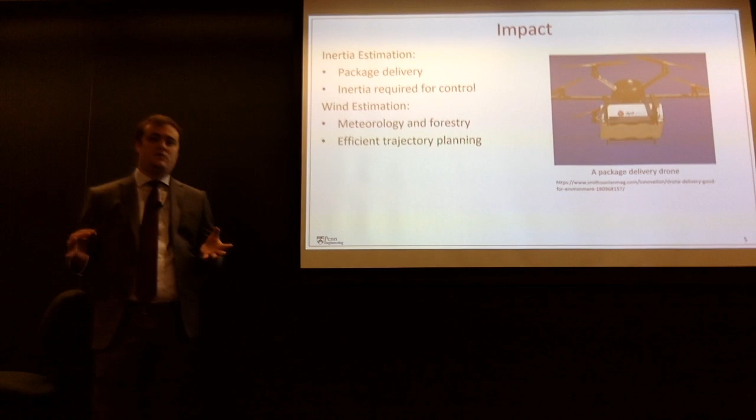Therefore, we have to design some rich trajectories that excite the system and get it far away from hover. The impact of this work is basically on package delivery. For inertial parameter estimation, this is important because when we're doing package delivery, we're constantly picking and placing packages, and that constantly changes the inertial parameters of the vehicle. If we don't know those inertial parameters, then we cannot precisely control the vehicle.

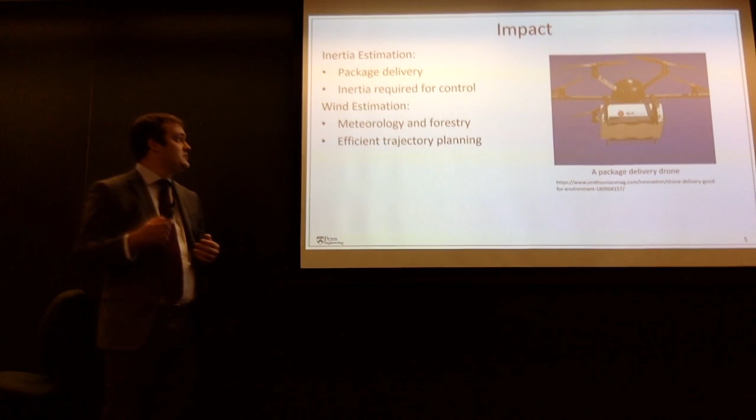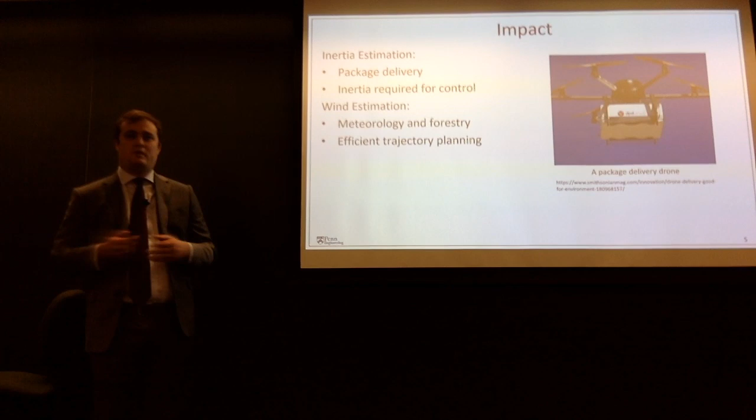We need to have some state estimation of those parameters online. In addition, wind estimation is important for any outdoor application, such as meteorology. Specifically, one that we've looked at is forestry. Spreading forest fires, predicting the spread of forest fires, is basically done using wind velocity estimates. Currently, the methods for doing that are very crude. They involve setting up a tower and a lot of manual labor, and you can only get a velocity estimate at one point in space at a time.

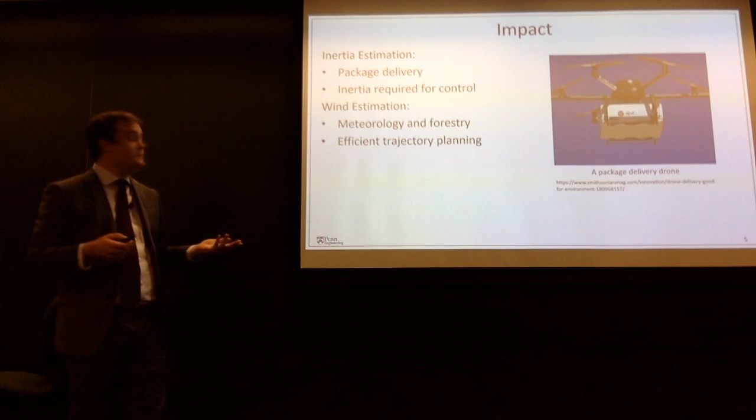But with a quadrotor, you can just send it up and get velocity estimates at varying points. Also, wind velocity estimation can be used to plan efficient trajectories that take advantage of the wind direction.

So the contributions of this are that we develop an IMU-based unscented Kalman filter that uses the full dynamics of the vehicle, Newton-Euler dynamics and motor dynamics, to estimate things like tilt, velocity, twist, and inertial parameters and aerodynamic parameters, and sensor biases.

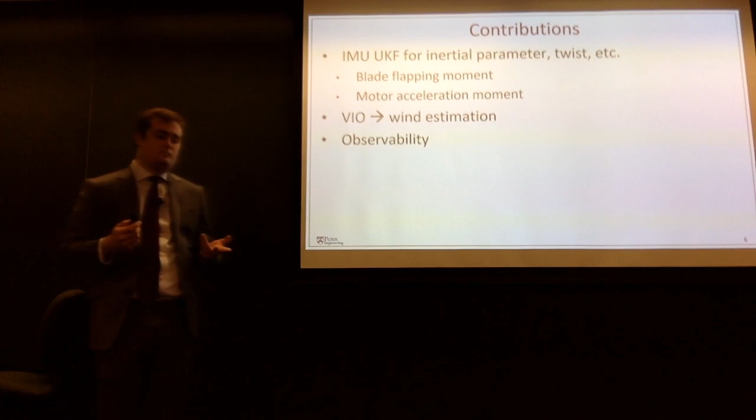In doing this, we estimate forces or moments acting on the quadrotor that we didn't anticipate would be significant, such as the blade flapping moment, which I'll discuss later, and the moment required to accelerate and decelerate motors.

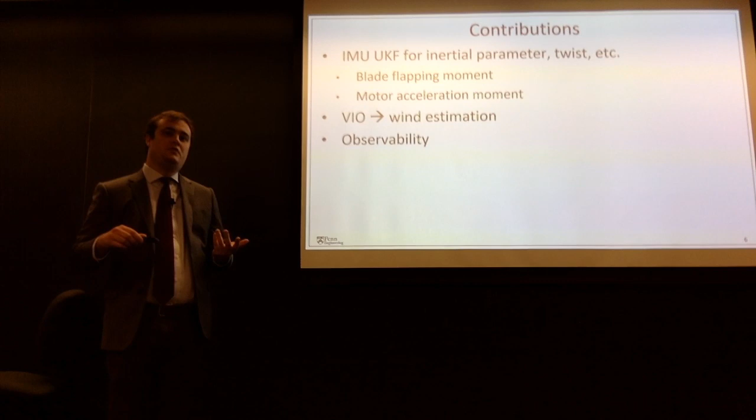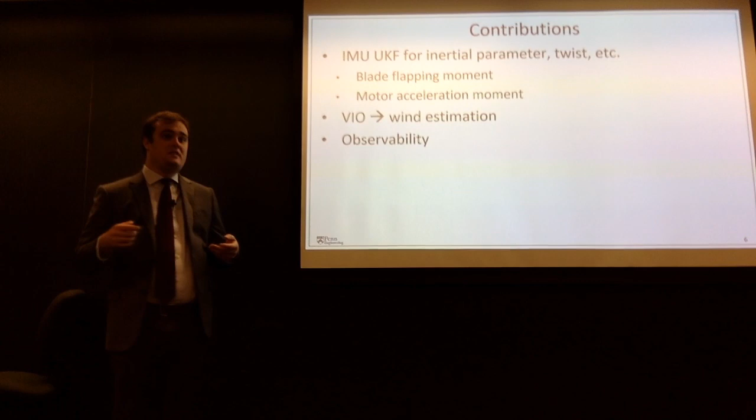In addition, we'll incorporate VIO into this filter to estimate the wind velocity as well. Then we will present observability analyses in the paper that show when these systems are observable, and I'll touch on that a bit in the presentation.

For a literature review, the most important works that we base all of our principles on are aerodynamic modeling, lumped parameter modeling works for propellers. Moses Bangura did a huge work on this that involves estimating lumped parameter models for the thrust variation of a propeller as a function of the induced velocity, which is the additional velocity that the propeller imparts to the air passing through it, as well as the velocity of the propeller relative to the air and the angular velocity of the propeller itself.

Induced velocity is hard to know, and it's very challenging to capture. So our contribution was to approximate the induced velocity as functions of the other two parameters, the blade angular velocity and the motor hub velocity relative to the air. We came up with a simpler model for thrust variation using that. In addition, Philippe Martin's work is also important because he models other things like blade flapping moments as well.

For velocity estimation, there are the following works. Abeywardena and Leishman did very similar things where they took these types of aerodynamic models and estimated the velocity of the quadrotor projected into the rotor plane, so they only estimated 2 degrees of freedom of the velocity. What Allibert did is he estimated the full 3D velocity using an induced power model for the propeller.

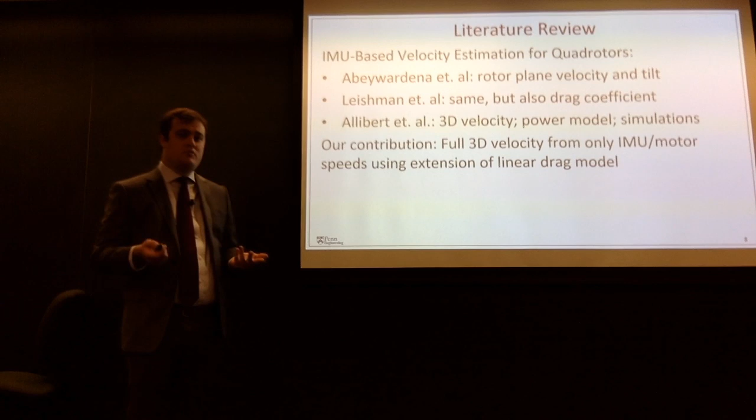His results are only in simulation, and his model assumes that many parameters are known, which are not very practical to know. So what we do is we don't make the assumption that many parameters are known. We basically assume that all the parameters are unknown, and we do full 3D velocity estimation using a simple linear drag model that also captures the thrust variation that I talked about earlier.

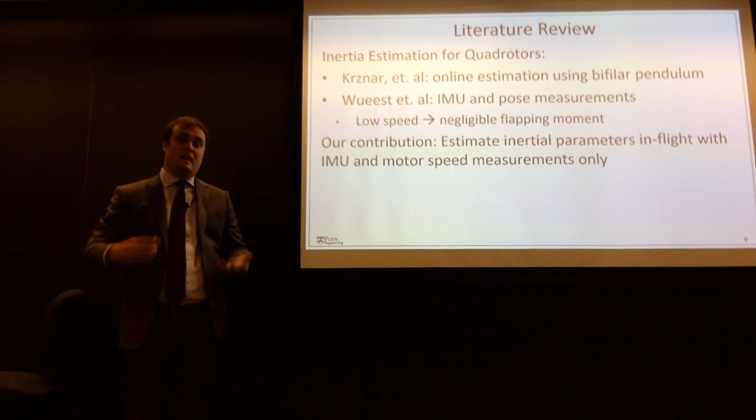For inertia estimation, there are a couple of works. The most important one is Valentin Wueest, a student in our lab, who did IMU-based state estimation using pose measurements for the moment of inertia of the quadrotor. Because he used vision, his system was observable in hover, so he could fly at low speeds and didn't see some of the aerodynamic moments we are modeling that appear at high speeds. Our contribution is that our system is not observable in hover, so we must fly at higher speeds and therefore capture these moments as well.

There are also many works on wind estimation for quadrotors. Most of them use indoor tests with linear drag models, testing with fans and similar setups. We want to capture wind velocity outdoors with a ground truth sensor measurement, an anemometer, and use the full Newton-Euler dynamics to estimate the 3D wind velocity, which very few of these works do. None of them really do it the way we do, specifically in how we model blade flapping as an independent effect.

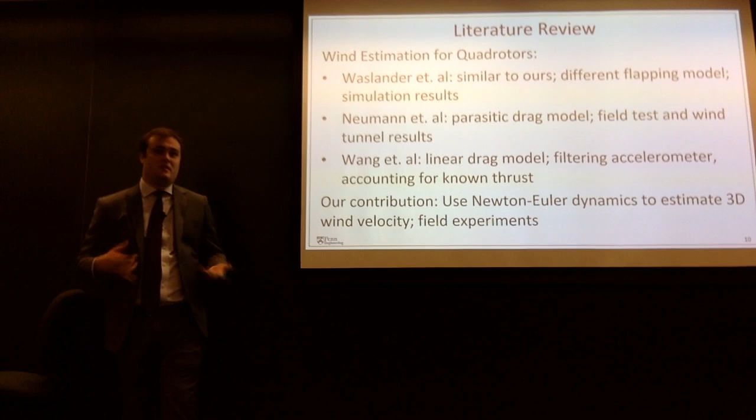So the next work that I'll cover is my past work, which will be somewhat brief. And for preliminary information, I want to...

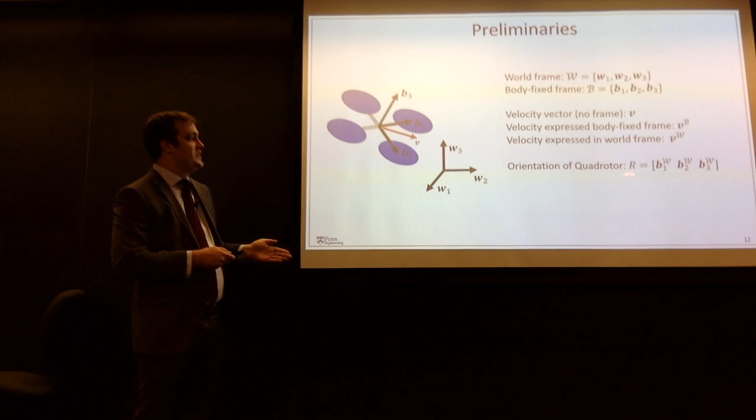I want to introduce the world frame, which is an inertial reference frame fixed to a point on the ground. It does not move or rotate. Then we have the body-fixed frame, B, which is fixed to the quadrotor and rotates with it. A vector V, shown in red, can be expressed in either the world frame or any other reference frame, but it doesn't need to be expressed in one. When not expressed in a frame, we just write V. If expressed in a frame, we write V with superscript B for the body frame or W for the world frame. For example, the orientation of the quadrotor, R, is a matrix whose columns are the basis vectors of the body-fixed frame expressed in the world frame.

Now we have the standard quadrotor model. This standard model, found in most literature, only models the thrust forces, these vectors here, the weight of the quadrotor, this vector, and some moments. These moments are drag moments: when the propeller spins quickly, there's drag proportional to the tip speed squared of the propeller. This moment produces a counter moment on the quadrotor frame, which is used to control the yaw of the quadrotor.

The rotation dynamics are presented in the body-fixed frame here. This red term accounts for the fact that we are differentiating vectors in a rotating frame, so we have to compensate for the frame's rotation. The reason we do this in the body-fixed frame is because the inertia tensor is expressed as a constant matrix in that frame.

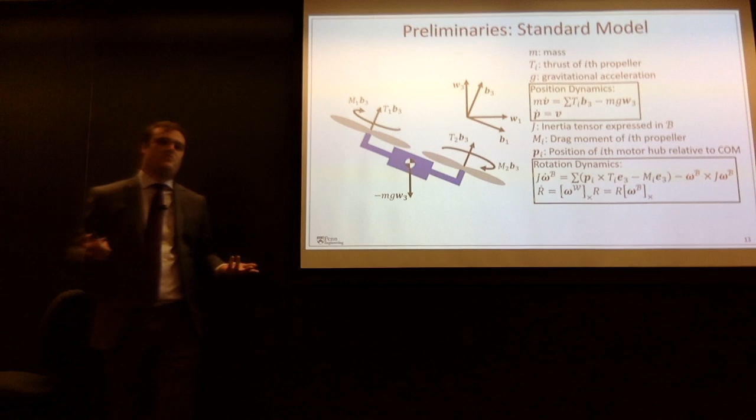The IMU is an important aspect of our research. It has a 3-axis accelerometer, given by this mass-spring model system, and a 3-axis gyro, which just measures a biased angular velocity, shown here.

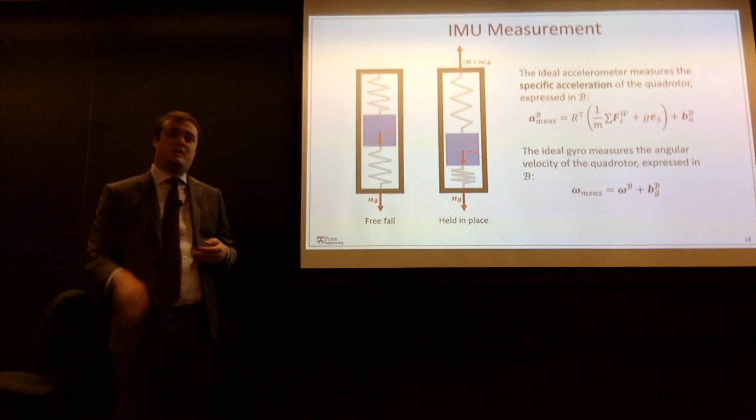The accelerometer is a bit more complicated: it measures the specific acceleration of the quadrotor, which is the acceleration caused by every force except the weight of the quadrotor. This red GE3 term cancels the negative term in the sum of forces, because when an accelerometer is in free fall, the housing and the mass inside accelerate at the same rate, so the springs do not deflect. Therefore the sensor does not sense the effects of gravity—even though it's accelerating down at 9.8 meters per second squared, it measures zero.

Now, the drag model basically takes this standard model and modifies it with a drag term that is proportional to the hub velocity in the rotor plane.

What we did in the past is we assumed that the angular velocity of the quadrotor was small, and therefore the hub velocities are moving at the same speed as the center, or the same velocity. The hub velocities and the velocity of the center of mass are basically identical at that point.

So we model this as being proportional to the velocity in the rotor plane. VRP is the velocity of the center of mass of the quadrotor projected into the rotor plane, and it's proportional by this constant here. The reason it's proportional to the velocity in the rotor plane is because the dominant velocity here is the tip speed squared of the propeller, and therefore that lies in the rotor plane. That's why this drag force is in the rotor plane.

When we measure this, when we use this drag force in an IMU-based model, our horizontal component of the accelerometer measures the drag force that is being exerted on the quadrotor.

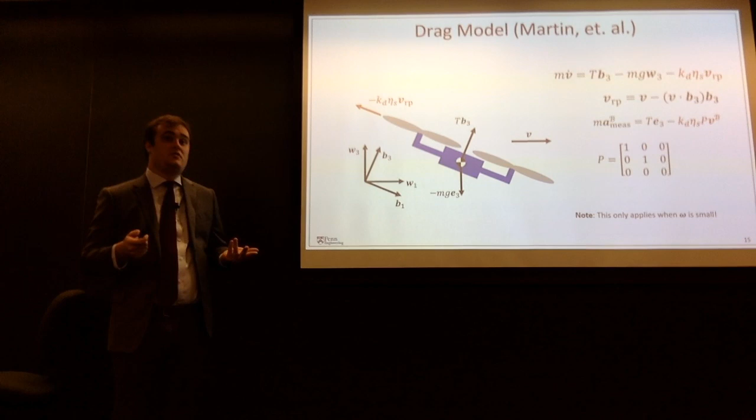Now what we did in our ICUAS work is we extended this drag model to account for the variation in thrust due to the fact that a quadrotor, when it climbs in ascending flight, loses thrust, and when it descends, it gains thrust. The reason for that was explained in my proposal, but basically we modify this model with a red term.

This red term is basically proportional to the velocity projected onto the B3 axis of the center of mass of the quadrotor. This term is lumped together with the drag force I just mentioned, and the reason for that is because they're both linear.

It's important to note that this is not truly a drag force, but just a modification to the thrust vector. But it behaves like a drag force, so that's why we lump them together.

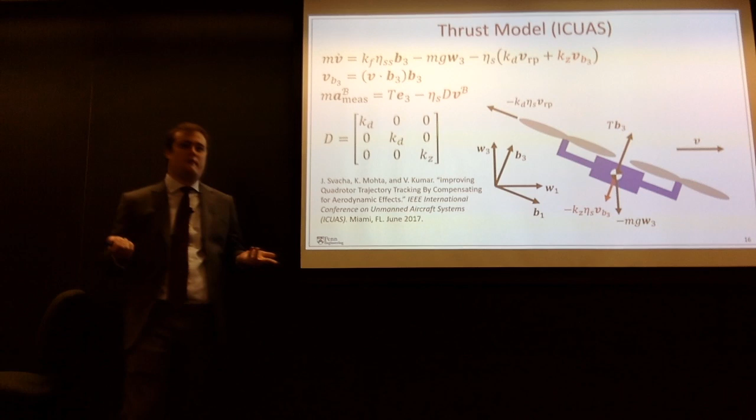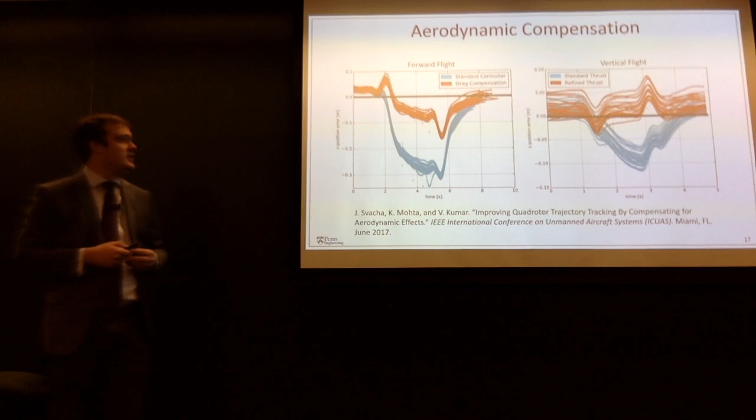On the right, we have the same type of experiment, but we're compensating for the change in thrust now, and we are doing vertical flight tests on the right, and you can see similar results for that. So we were able to show that we can compensate for these effects, and that they are indeed significant.

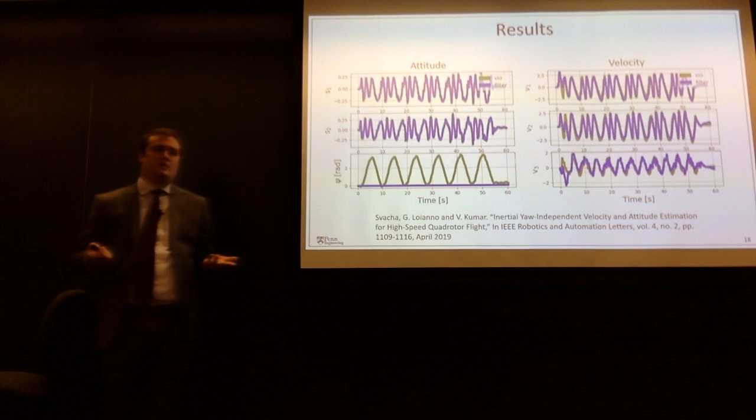I want to highlight the fact that we are using a strapped-down, inexpensive, and low bandwidth sensor to estimate wind velocity relative to the air, or indoors, essentially velocity relative to the ground of the vehicle. This is significant because normally you would have to use vision to do this, and that would incur a lot of overhead. But for completeness, we did use vision for yaw estimation.

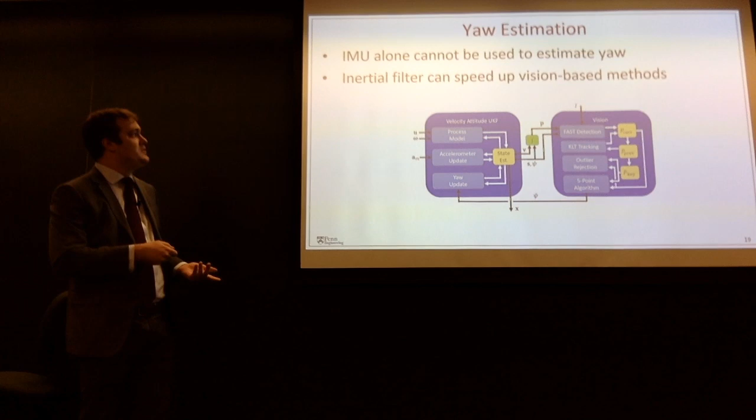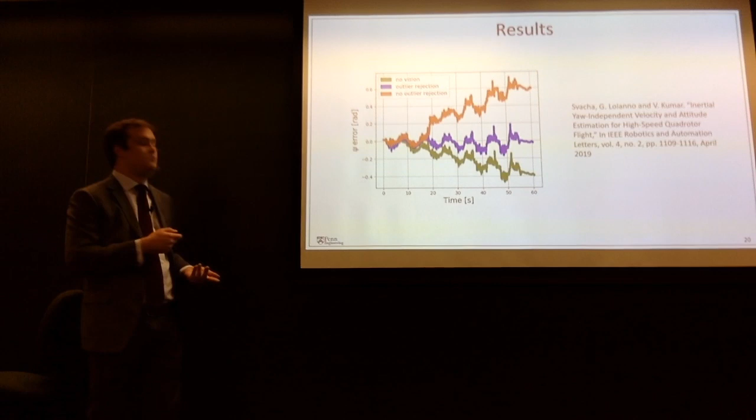The point is that the outlier rejection was significantly faster, and it was also working, because this blue curve is much smaller in magnitude than the red and green curves. The green curve corresponds to dead reckoning, and the red curve corresponds to using vision without outlier rejection. So it's clear that the outlier rejection did improve things, and that the vision was working for the yaw estimate.

Now I'm going to discuss the bulk of my presentation, on the recent work I've done since my proposal. Everything we're about to cover can easily be extended to multi-rotor vehicles in general, not just quadrotors. We think doing so is easy and isn't even worth extra research, which is really good for us.

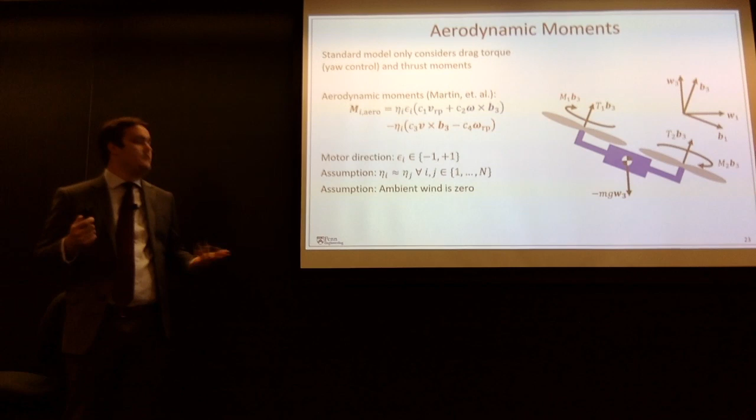So the aerodynamic moments, the red term I just showed, can be split into this green term here, which is a blade flapping moment, and the blue term here, which is a thrust difference. It's basically a damping: when you roll with an angular velocity, there's a damping term. I'll talk a bit about both of those.

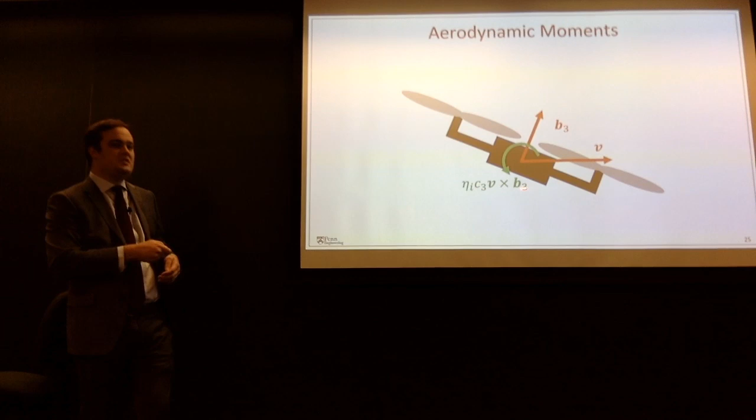The blade flapping moment basically acts to counter a quadrotor in forward flight. It's pitching forward to accelerate or keep a constant velocity if there's drag. What the blade flapping moment does is it acts in the V cross B3 direction, out of the board using the right-hand rule, and it basically functions to resist the forward tilt of the quadrotor. That's a bit of intuition about what the blade flapping moment does.

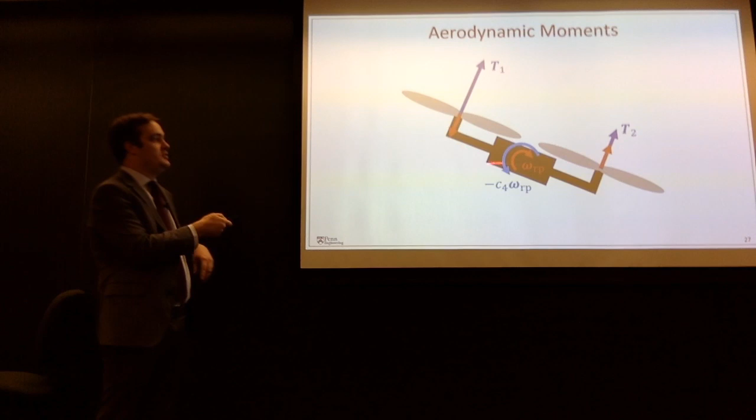Now the other moment I mentioned was the damping term. Due to the variation in thrust from the velocity of the hubs, when rotating clockwise in this case, this hub has a downward velocity and this hub has a velocity in this direction, so they exert drag-like forces. These drag-like forces cause the moment shown in light blue here, which again is a damping term that resists the direction of angular velocity.

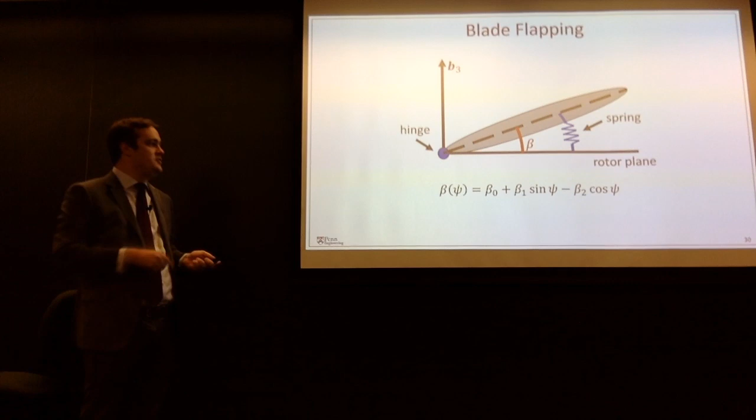Now, the moment here in the AI1 direction is proportional to beta 1 because it is the moment reacting on the hub at 90 degrees azimuth, and beta 2 is proportional to the AI2 flapping moment.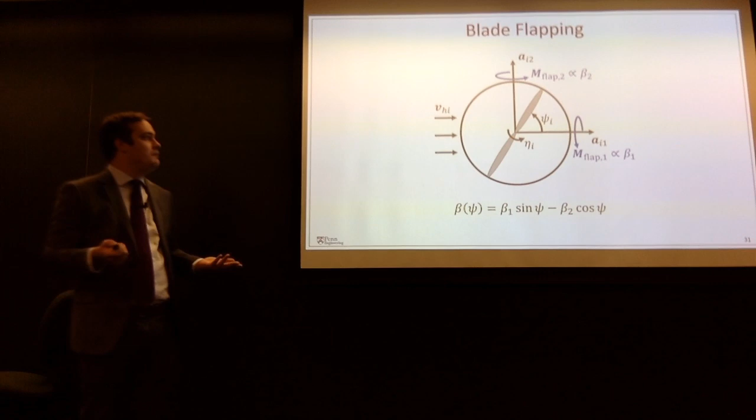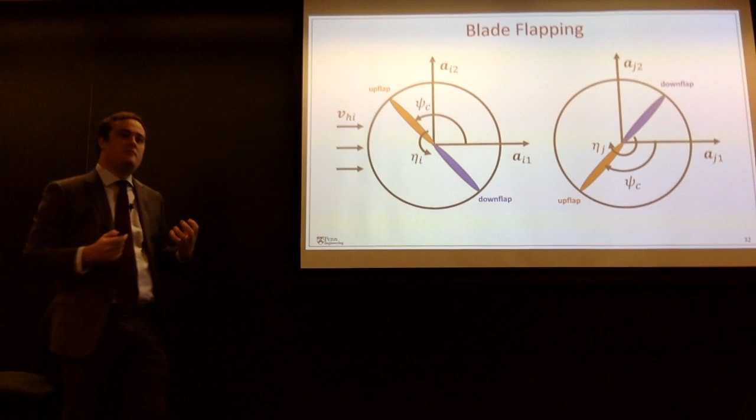We want to see which of these is more significant. Do we need both moments, AI1 and AI2, in the model, or can we only take one of them? This slide shows a counterclockwise propeller and a clockwise propeller, and the point is that the maximum flapping, the azimuth angle corresponding to the maximum flap, psi sub c, is the same magnitude for both, but it's defined differently for clockwise and counterclockwise propellers.

This means we'll generate these moments shown in red here, and when you sum them up, since you have an even number of clockwise and anti-clockwise propellers, the AI2 components accumulate because they're pointing in the same direction, while the AI1 components cancel because they're pointing in opposite directions. This is why the blade flapping moment is in the V cross B3 direction.

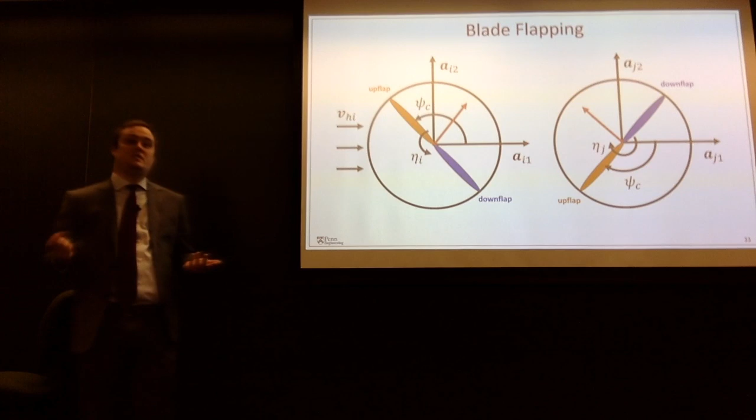So now that I've explained the intuition behind blade flapping, I want to ask: is it significant? We tried to do the estimation without it at first, just to keep things simple, thinking it's probably not significant, because these are very stiff blades. Why would they flap very far distances?

This ends up being because we ignored the blade flapping moment, and we had such high velocities in our trajectory to keep the system observable. But at first we didn't see this, and we were troubleshooting, thinking: okay, what can be wrong? We must be missing some kind of effect, assuming we implemented the filter correctly.

That are significant on the vehicle. So how does the filter compute the angular moment of inertia of the vehicle? It regresses the angular acceleration, assuming the Coriolis term is small, which it usually is, against the moments on the vehicle, so they're proportional to each other by the moment of inertia J.

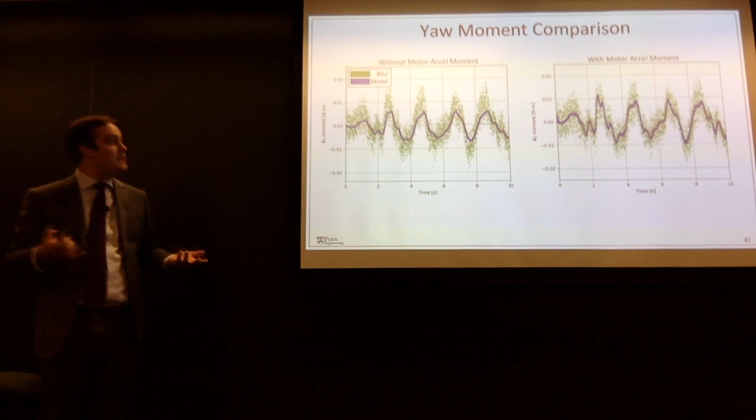You'll see the thing I was talking about earlier, the amplitudes being small, is kind of fixed here. And at this moment, in my toy example, it's off to the right of the data, but here it's kind of middling it. So this kind of fixed the problem. Essentially, there's some high frequency components that were not captured in the green data by the purple that now are captured.

So I mentioned we tried to do an observability analysis, but the previous system, which was a little hacky, required unknown control inputs, and that ends up being more computationally difficult to do an observability analysis with.

So what we did is we said, okay, we know our commanded motor speeds, and we know we have measurements, RPM feedback on the quadrotor. So what we're going to do is come up with a better model for the motor dynamics.

Basically, we're modeling the motor controller on board, which models the torque being applied to the motor as being proportional to the error in the RPMs. And also, there's a feed-forward term, which is the drag moment term that I was talking about earlier.

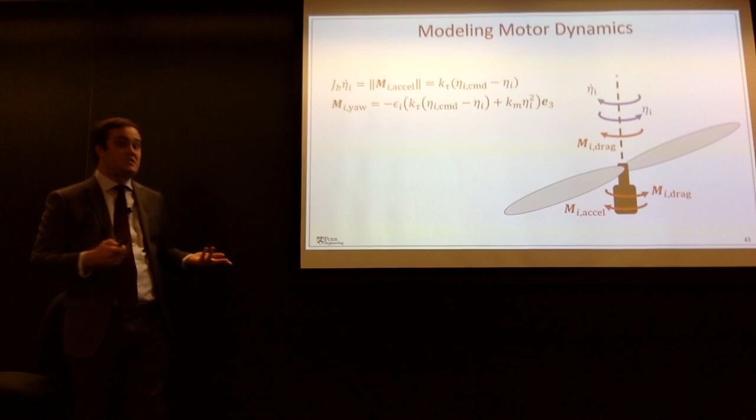Essentially, these are the motor dynamics. The drag term here cancels with the opposing drag on the blade, and all you have left is this torque required to accelerate the motor. This was easy to show that it was observable. So we were able to show observability of this system, but it is not observable in hover, as I mentioned.

Now the full Newton-Euler unscented Kalman filter is shown here. It's estimating the tilt, the twist of the vehicle — linear and angular velocities — the IMU biases (accelerometer and gyro biases), the motor speeds, and inertial parameters, including the position of the center of thrust relative to the center of mass and the position of the IMU relative to the center of mass. It's also estimating other parameters like the torque coefficient of the motor and aerodynamic parameters. Altogether, this is a 32-dimensional state.

The process model here is the position and attitude kinematics, specifically the tilt kinematics, and the dynamics for position and orientation. What was previously unmodeled was that each hub is moving at a different velocity from the center of mass — but now we're capturing that. V sub I, the velocity of the ith hub, is just the velocity of the center of mass plus omega cross r.

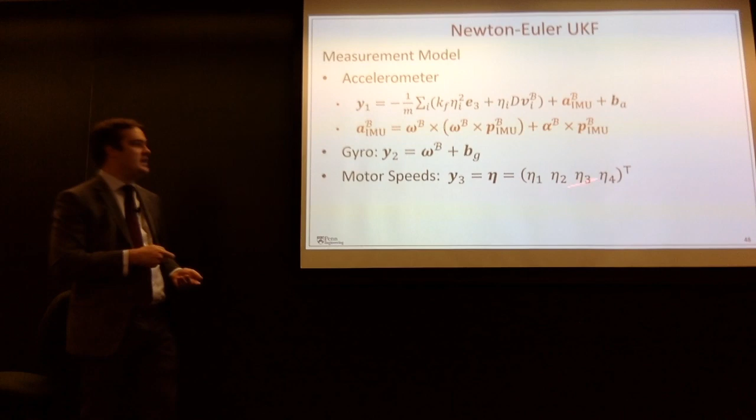It is estimated through this correction term, which is the acceleration of the IMU relative to the center of mass. A lot of you have seen this before—it's just the centripetal acceleration plus the tangential component of acceleration of the IMU. We also have biased gyro, or biased angular velocity, and a motor speed measurement as well.

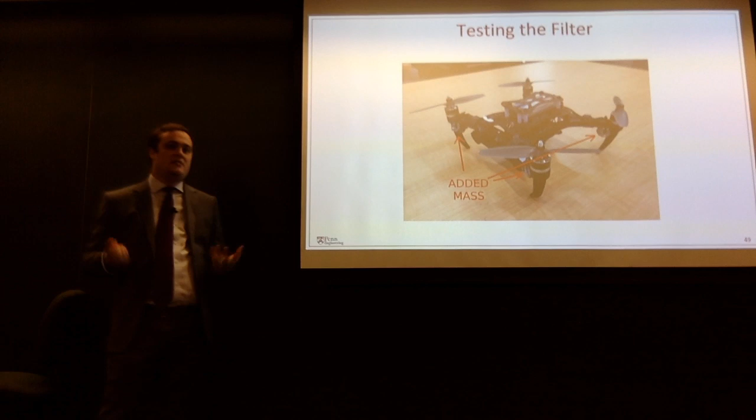When we tested the filter, we took the quadrotor and flew it around, and estimated the moment of inertia and the other parameters. Then we added masses to the quadrotor, which changed the mass and moment of inertia of the vehicle. We added these metal nuts along the booms of the quadrotor, and used the parallel axis theorem to compute roughly what the change in moment of inertia would be.

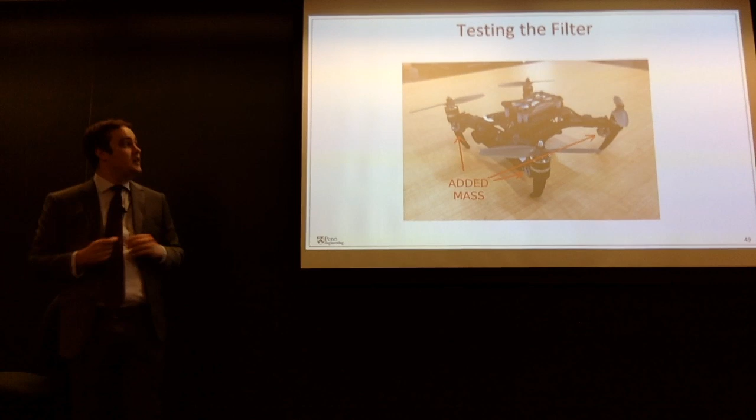So that covers my work on inertia estimation, and now I want to talk about wind estimation. Wind estimation uses a simple concept called the wind triangle. Basically, the wind triangle says that the velocity relative to the ground minus the velocity of the wind is the relative airspeed.

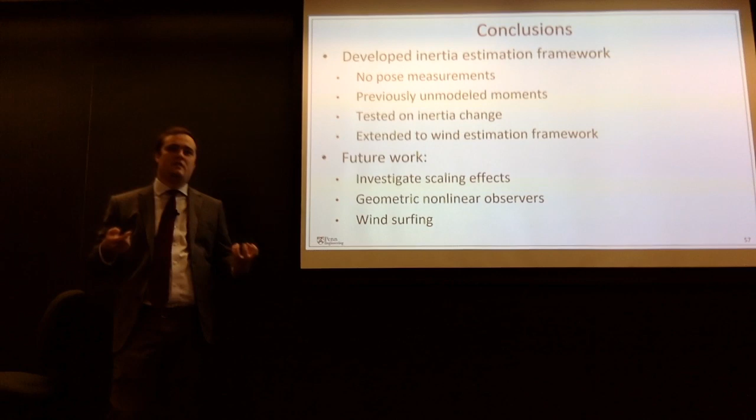Instead of using Kalman filters, we want to look into using geometric nonlinear observers. We also want to look into following an integral curve of a wind field, which is why I call it wind surfing. So if you're a quadrotor and want to explore or go a long distance, following the wind gives you an efficient trajectory, letting you travel further for a longer period of time.

And I want to acknowledge people. Do I do this now or after?

Thank you so much for coming out. With that being said, I would like to end my presentation and take questions.

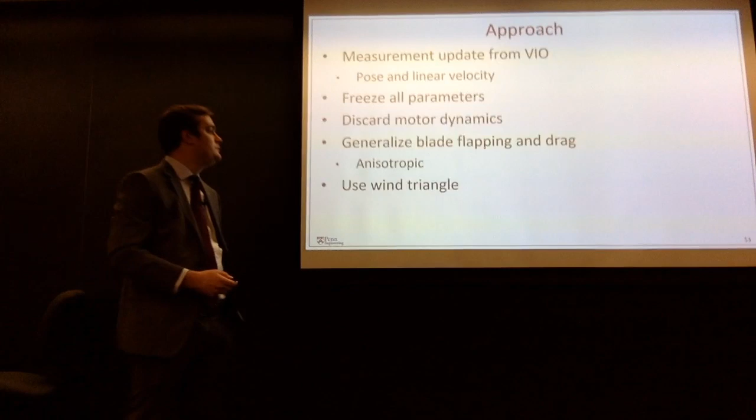Yes. Slide 35. So here you're using M, an estimate of M. Is this estimation done incrementally like a filter, or is it like a least squares?

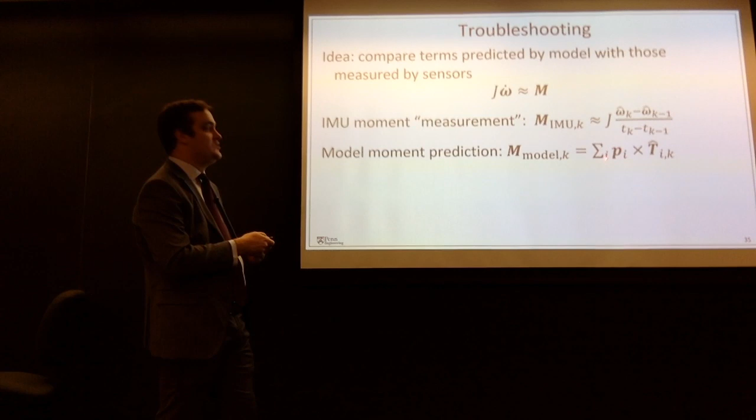It's actually just instantaneous. So when we're plotting these things shown here, we're just at each step of the filter. Any quantity that has a hat over it is an estimated quantity. What we did is we took the known position difference and crossed it with the thrust that we knew at each time, and summed that up. That's the moment as dictated by the model.

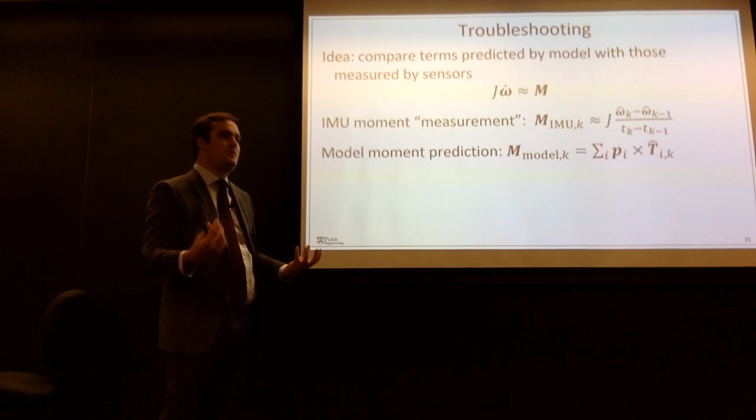So the thrust was filtered. Yes, it was filtered because the KF at the time we were estimating the KF value of the propeller, so that was filtered, and we assumed we had instantaneous feedback for the motor speeds.

So the T hat has an integration inside it over time, while the other one is just a difference, right? Right, the accelerometer - but the omega has an integration from the filter probably. The omega has some integration and some smoothing from the filter, so we didn't just take the gyro and difference it, because that would have been horrible. Okay, yeah, that's great.

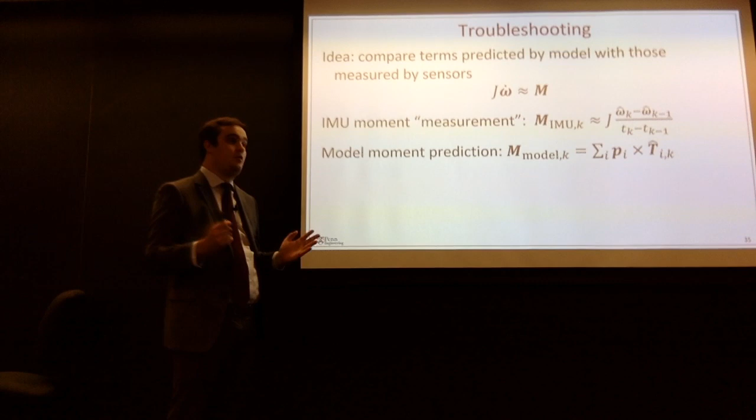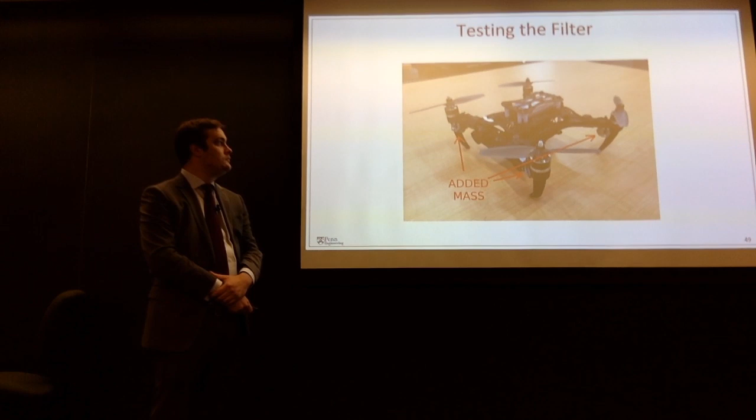And the J's ideally would be derived from the previous, from the J omega dot equal M equation.

So if there was a package and something would move inside the package, it would be readjusted? I think so - if you had that, then the moment of inertia of the vehicle would not be a constant either. So you need to assume that things are securely stored in the package, but it could be readjusted over time. Though if it's constantly moving, I don't know if it's going to converge to that readjustment quickly enough. What's the rate of convergence of your estimate?

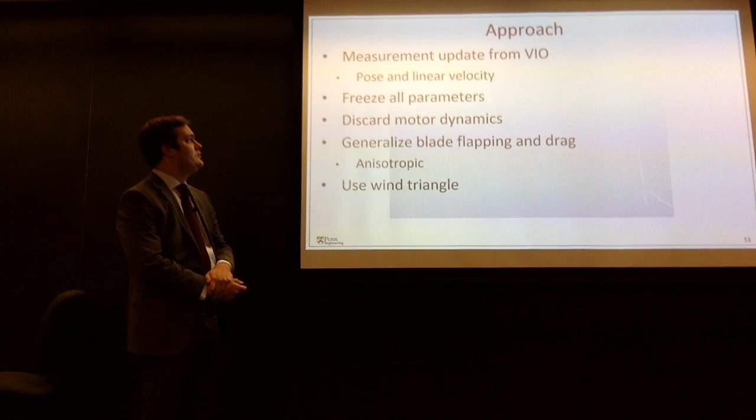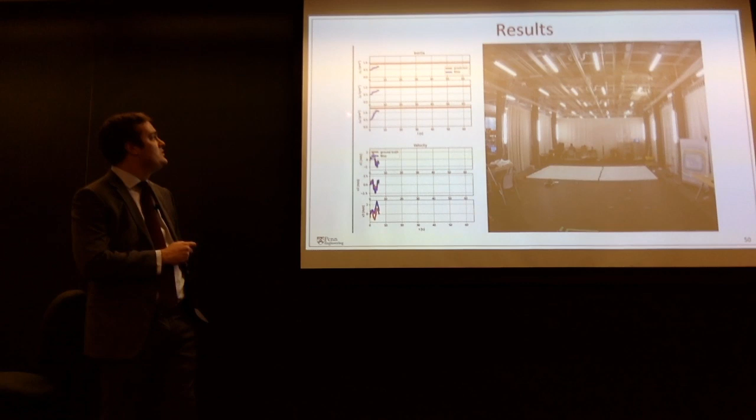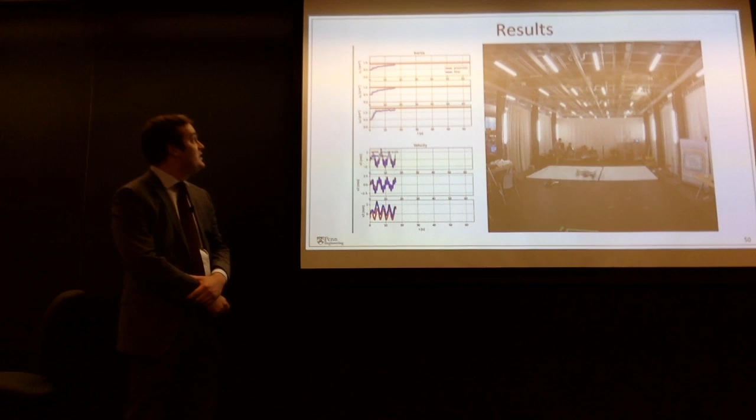It took a bit of time for this thing to converge. I don't know the exact number, but it seems like after about 5 seconds, it gets about 80 to 90% of the way there.

Does the UKF itself have a temporal window or sliding window, or is it just updated after every IMU measurement? After every IMU measurement, it's updated.

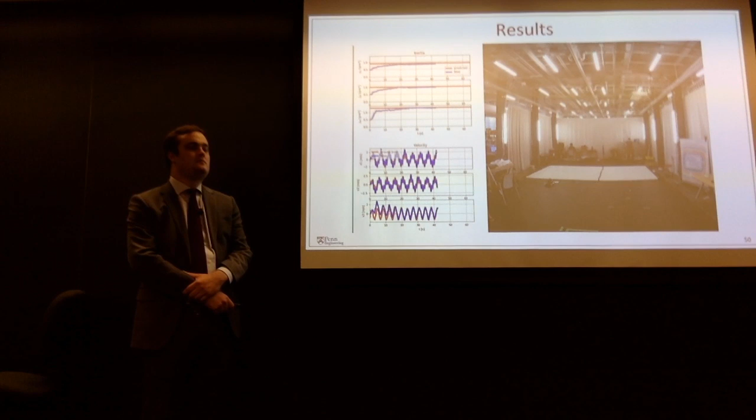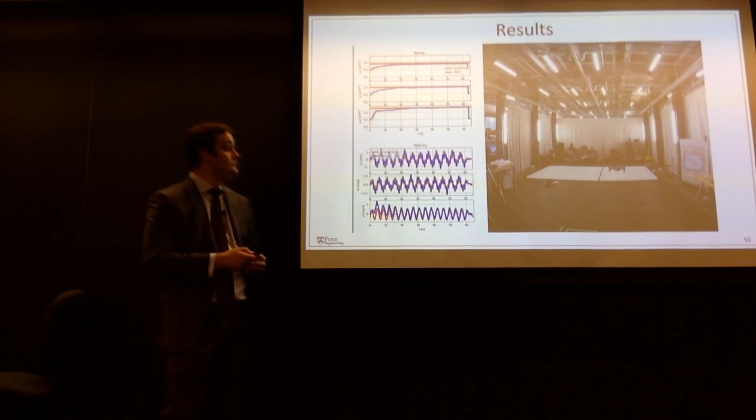So I'm confused about the IMU in the V minus W. When you estimate the velocity relative to the ground, the acceleration and omega you're using as a measurement from the IMU is not the same as the one used in V minus W. The accelerometer from the IMU - good point, they're used in different ways. The IMU is used in the full dynamic model for V minus W, and it's used just in a kinematic model for the VIO.

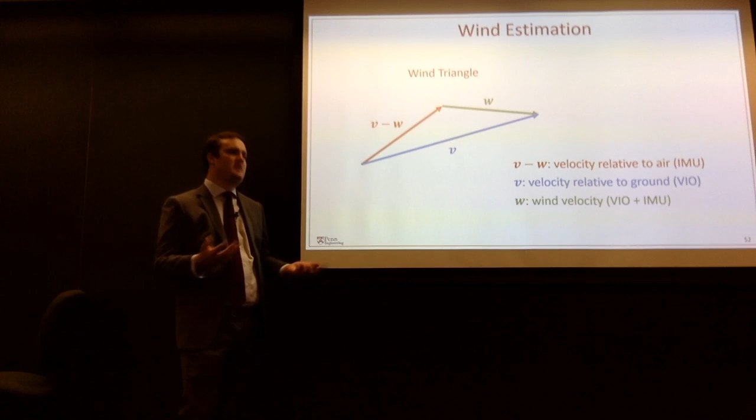I was thinking about this - is this actually a contradiction? I don't think it is, because the IMU is measuring the specific acceleration of the quadrotor in the VIO. So it's a little bit more like a loosely coupled approach, I think, is the takeaway. The terminology is confusing, so you should fix that. Okay, two different models, right.

This is really great work and very clearly described. Oh, thank you. CJ?

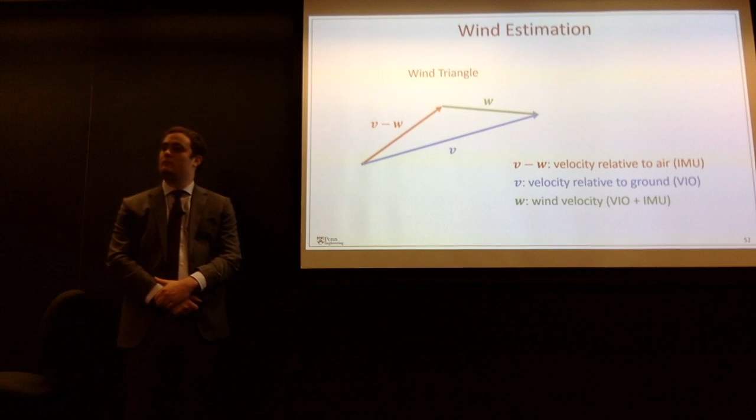I forget what the slide number is, but again in the modeling you point out that one of the contributions is to take advantage of the blade flapping moment. Can you talk about what the relative magnitude of that term is as a function of speed, or where it becomes significant?

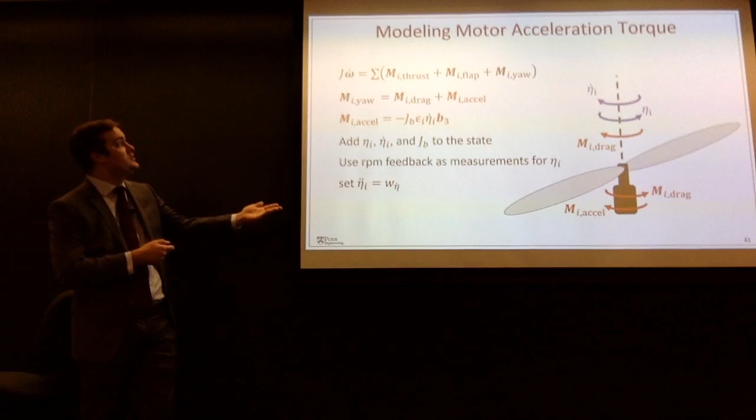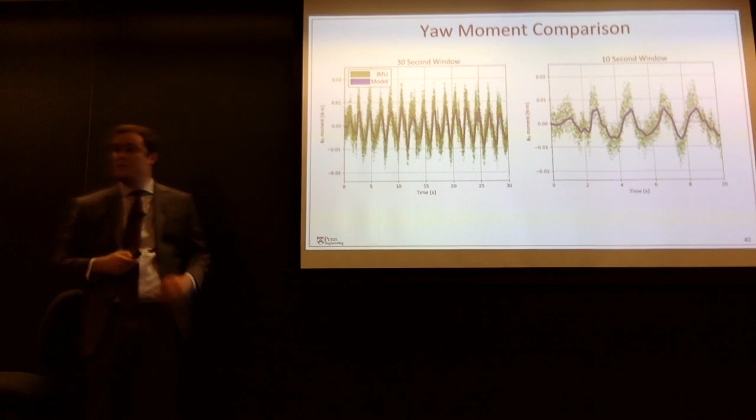That's a significant force on this quadrotor. We compared it - here's the yaw moment, this is the actual magnitude of the yaw moment, and you can see it's around half a Newton centimeter, maybe at peak, in the blue. So really a Newton centimeter was definitely enough to throw our estimates off quite a bit. 1 Newton centimeter was basically enough to throw our estimates off, and that's why we were getting completely inconsistent yaw moment of inertia estimates from not incorporating the flapping moment.

One question I had was, in the current model you are estimating actual rotor speeds and comparing them against commanded speed, right? They show up as something that's been estimated. How much better would life be if you had an encoder or a beam break sensor giving you accurate propeller speeds?

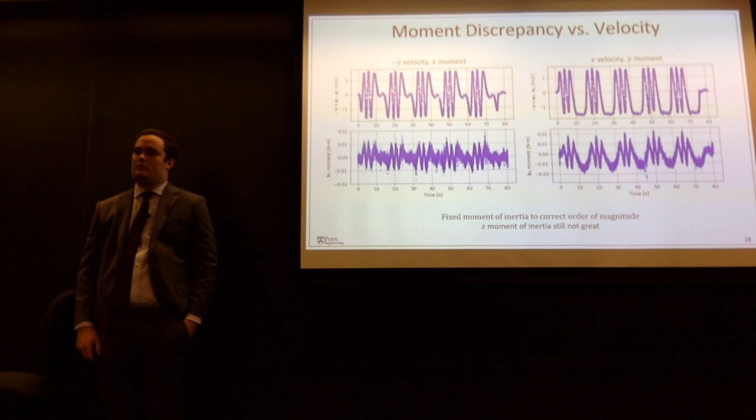One other thing, in some of the plots you showed, particularly towards the end for the wind, they track very nicely qualitatively. I was wondering whether there were quantitative metrics. We do have quantitative metrics in the paper. So what we do is we take the RMS of the signal and put that in the denominator, and we take the RMS of the error and put that in the numerator. So we have a way of not just saying this is the RMS error, but normalizing it by how large the signal actually is.

The RMS of the signal is in the denominator, and that's how we did a lot of these metrics for the filter, like for the inertia estimation as well. It turns out that you can do really well if you're around 20%, and if you're around 80%, that's not great. If you're around 40-50%, that's reasonable for wind estimation with unknown conditions, because we don't actually know what the wind velocity is where the quadrotor is. We only know it in the vicinity of the quadrotor at a sampled point.

All right, so those numbers do exist. They do, I put them in the dissertation. I put them in, I sent it. That's right there, that table, yeah. Yeah, it's right there, you might have an older version of the dissertation. That might be why, because I sent one recently, I think on Friday maybe. I'm not sure.